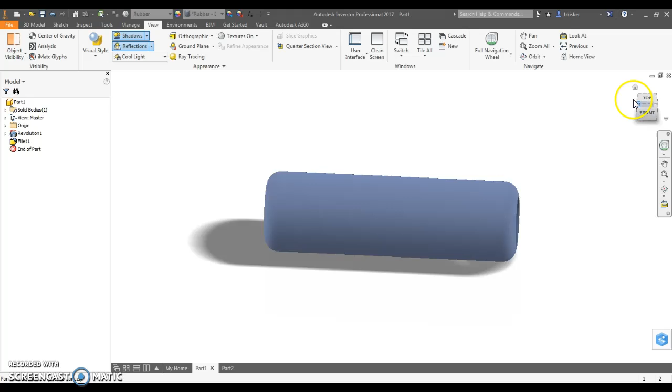Hi, in this video I'm going to try to walk you through the rubber sleeve on Autodesk Inventor, which is part of Introduction to Engineering Design. You can see a finished product here. It should look like this. I've added some shadows and some texture to it just to make it look a little bit more realistic, give you an idea what's going on. Think of it like a bike handle. You might slide this around the end of a bike handle or something.

So how do we create this? We're going to use the tool called the Revolve Feature. It's up here in the 3D modeling tab right next to Extrude. So I'm going to walk you through that process. Let's start off with some dimensions here.

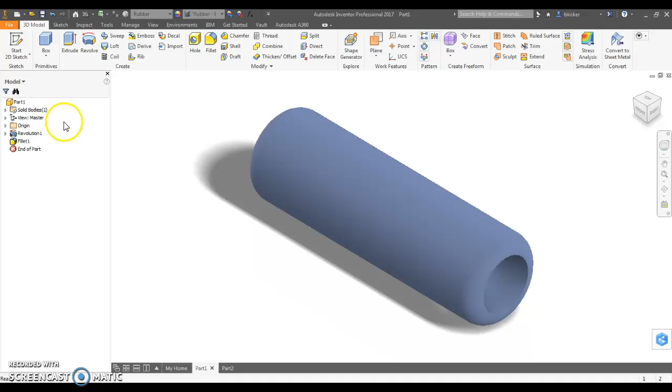So the first thing that I'm going to do is create a new sketch. So I'm in a new part now. New sketch. And I would always suggest that you draw your axis of rotation first. In this case, since it's not part of the feature, I'm going to lock everything into it. So I'm going to start at the green dot here. I'm going to come out. It really doesn't matter how long this axis of rotation is. It could be an inch, it could be a mile. Autodesk Inventor does not care.

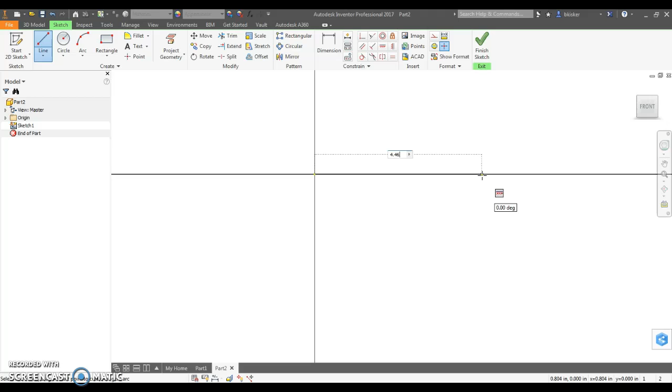But since the whole part is 4.469 inches long, I figure that's a pretty good start. Now my line will be exactly the same length as the actual sleeve itself. Because it's not part of the feature, we don't want to just leave it as a solid line. Let's go ahead and turn it into a construction line. That's one thing you can do. Now it's a dashed line, and a dashed line just means it's not part of the final shape. It's just a line that we're using for reference.

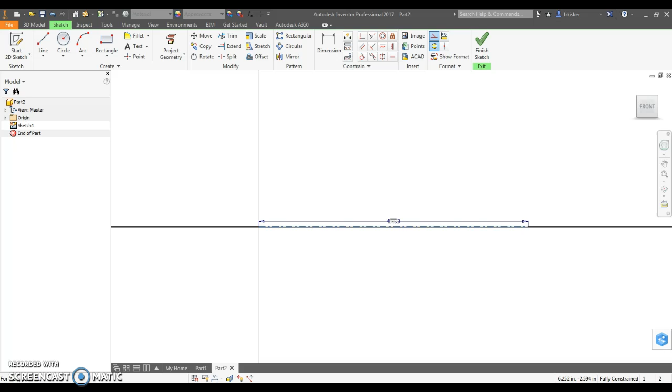But even better than that, I can come up here and use what's called the Centerline tool. If I create a center line, now we get that long, short dash, and my dimensioning is going to work a little bit differently, and it's going to be really convenient later on. So that's my first step. I've got that thing fully constrained. You can see down here. Now it's time to go add the rest of the shape.

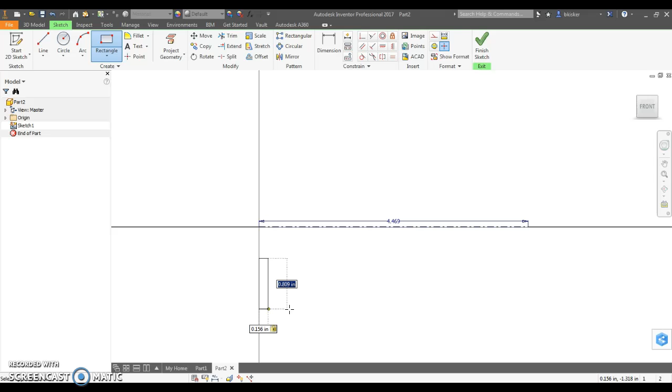So I'm going to draw an L-shaped feature down here. I'm going to work quickly. I'm going to trust that you can go read the dimensions later on. I think the easiest way to do it would be to start with the rectangle that starts here, goes down. It's 0.156 wide. The height, honestly, I'm not really concerned about that yet. And then I'm also going to have a rectangle here. The rectangle is going to be 4.469 inches long, and it's going to be 0.25 inches tall.

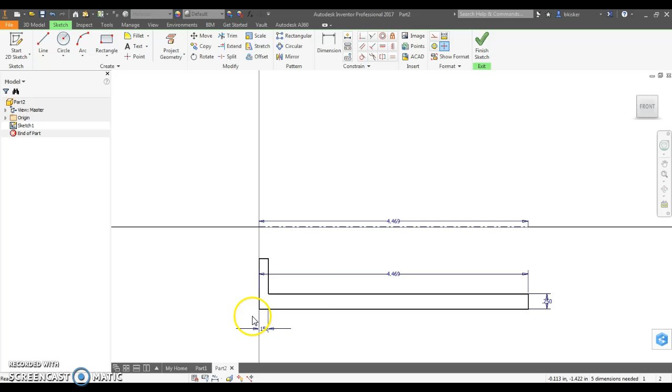So now I have a little bit of an outline here. I don't have it in place yet, but it's close. I'm going to use the trim feature. I'm going to get rid of the junk in here and here, and that way I have a full L-shaped outline. Move this also down real quick. Oops. Escape out of my dimension tool. Here we go. Okay, so that's a good start.

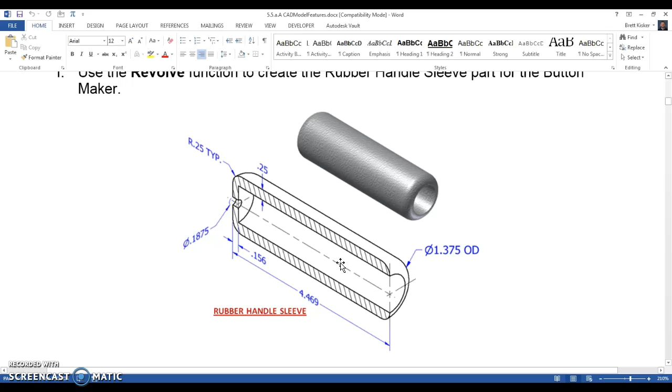Okay, but when I dimension, I'm going to dimension from the bottom surface to the center line, and that makes you think, well, hey, I got a radius then. I got to cut this 1.375 in half. But watch what happens because I used the Centerline tool here. When I go to dimension and I say the distance from here to here, which I'm thinking is a radius of a circle, look, it says, well, listen, if it's a center, that means it's going to be symmetrical.

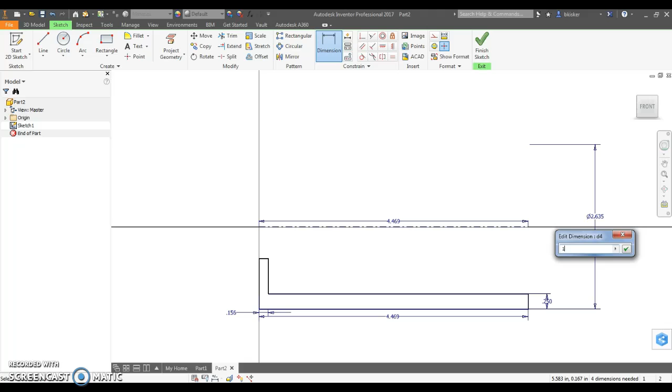You're probably going to use revolve. It's trying to guess ahead at what you're going to do. So I can come over here and it shows the diameter symbol. So I can just type in the 1.375 exactly like I see it, right? Now, I can see here that that shifted things up a little bit. So right now, before I go any farther, I'm going to take this guy. I'm just going to drag it back down, kind of get it in the right spot.

Okay. Now we're going to do the same thing over here on the left. And you notice on the dimensions that 0.1875 is the diameter of that circle. So I'm going to come over here. I'm going to dimension from this line to my center line. It uses the dimension line. It still says that, right? 0.1875. And I have the diameter tool, which means that I know I'm pretty good here. Okay. I still have 3 dimensions that are needed.

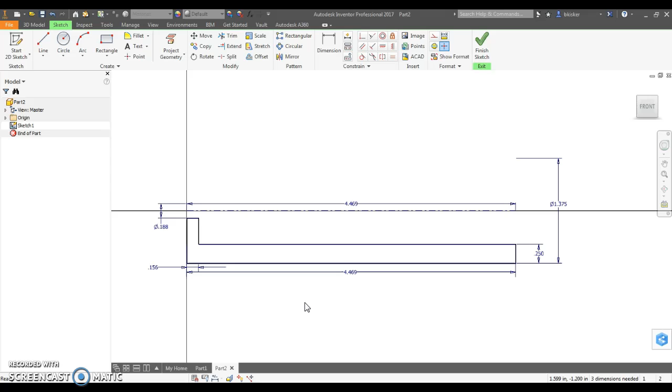And this is kind of the point where kids go, oh, what's wrong? How do I even know what I need to dimension at this point in time? Don't forget about your light bulb at the bottom. It'll show you what it'll move, okay? You can see that everything can move left to right, okay? That's a problem. We don't want it to be able to move left to right, okay?

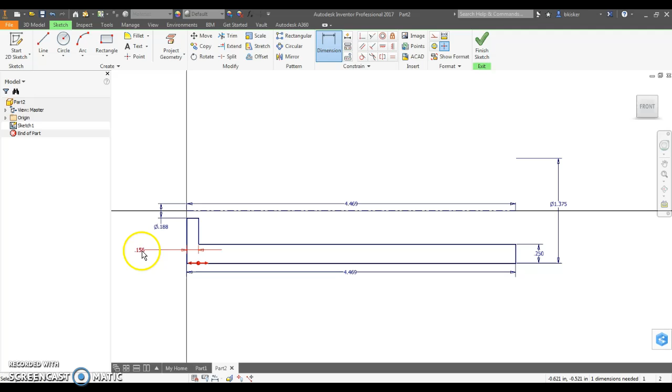So in order to do this, I think the quickest way to take care of that is to say I'm going to vertically align the endpoint here with this corner. Now that can't move. I'm going to do the same thing on the left hand side. This endpoint, that corner, and this endpoint are going to stay. It looks like I lost my 0.156, didn't I? You know, I'm going to delete that for just a second. I'm going to come up here and redimension from here to here. That's 0.156. Now it says I need one more dimension.

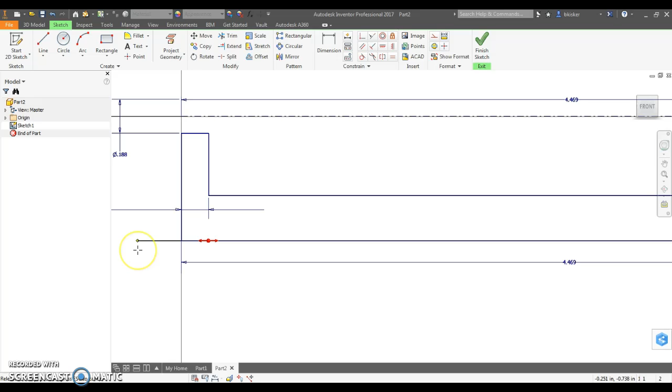Oh, okay. Well, here was what happened. I had a rectangle. The bottom of that rectangle is no longer existing, right? Okay. So because I cut out these parts earlier, if you remember, I trimmed those. So I'm just going to take that. I'm just going to delete it. I think that'd probably be the easiest way to get rid of it. If I can't latch onto it, I'm going to take that red dot and drag it off to the right, and now I can delete it. Okay, it says fully constrained. I have my outline. Nothing can move.

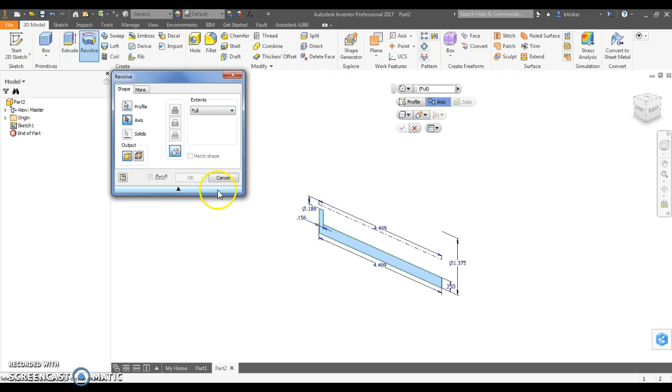I'm ready to revolve. I'm going to finish the sketch. I'm going to click revolve. The profile that I want is this thing right here. Click here for axis, and the axis that I want is the center line. And notice, there it is. It's created. Large opening on the right, small opening on the left.

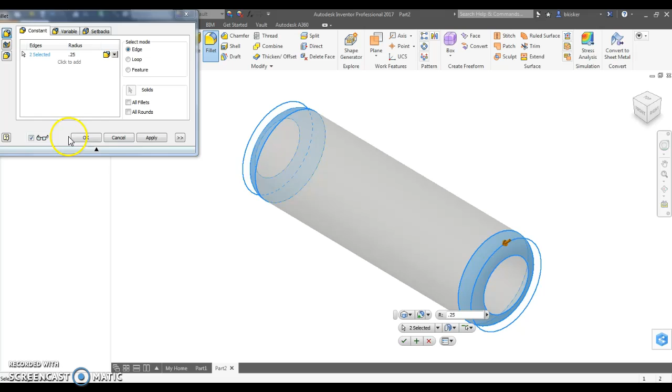The last thing that we have to do then is just to fillet the edges, and the radius for the fillet in this case happens to be 0.25 on both the left and right ends. Click OK, and you're done. If you want to go through and mess with textures and lighting and shadows and stuff, you can. Not necessary, really. Just want you to be able to use the Revolve feature and read some dimensions. Hope this video helps you out with the assignment for Introduction to Engineering Design.